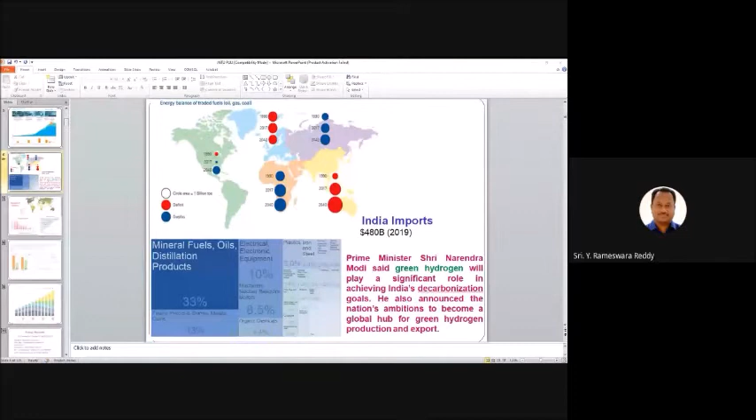So now we will discuss about this energy balance for different fuels for different countries. If you see USA, in 1990 they were an energy deficient country basically, but now they are a surplus country. Again if you see Middle East, they are always an energy surplus country, and European Union is always energy deficient even by 2040, similar to Asian countries like India, Sri Lanka, Bangladesh. Even China, these are energy deficient countries.

Also you see in 2019, India imports around $480 billion. So in that, if you see, 33% is coming from the fuels, that is we are importing too much oil from other countries. So if you want to increase our GDP as well as develop our own resources, we should decrease the imports of oils and other products.

Maybe you have seen, I think recently, the Prime Minister has given some speech on Independence Day. So what he said is that green hydrogen will play a significant role in achieving India's decarbonization goals. He also announced the national ambition to become a global hub for green hydrogen production and export. So what it means is that now we are importing too much oil and gas, and we want to reduce this. We will generate hydrogen in India and export it to other countries, meaning we'll decrease the imports and make hydrogen exports to other countries. That is actually the goal of the Indian government.

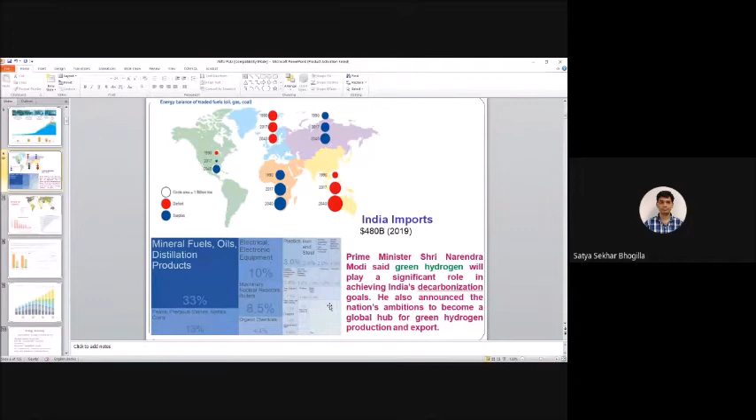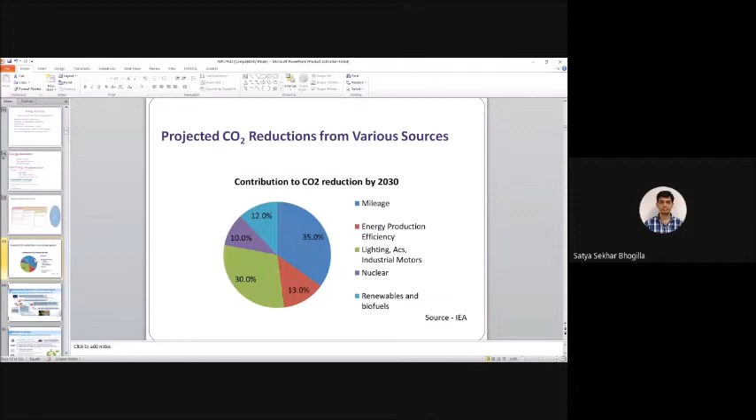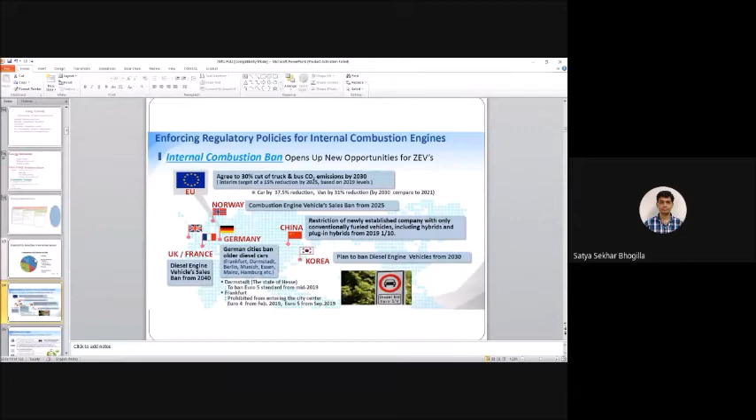What is the replacement of these IC engines, and what is the replacement of oil for the transport sector? First, one option is natural gas, but the problem is it's not a long-term solution.

Second option is second generation biofuels. But if you use too much biofuel, it may impact the food situation because you are using land to generate biofuel. Again we have impact on environment, because if you use too much land, you have to cut forests and use more fertilizers and water.

Then we have a third option, electrical drives like lithium-ion batteries and other kinds of batteries. At present, battery vehicles are getting importance, and the government is already giving some subsidy to electrical drives. Then another option is hydrogen as a fuel.

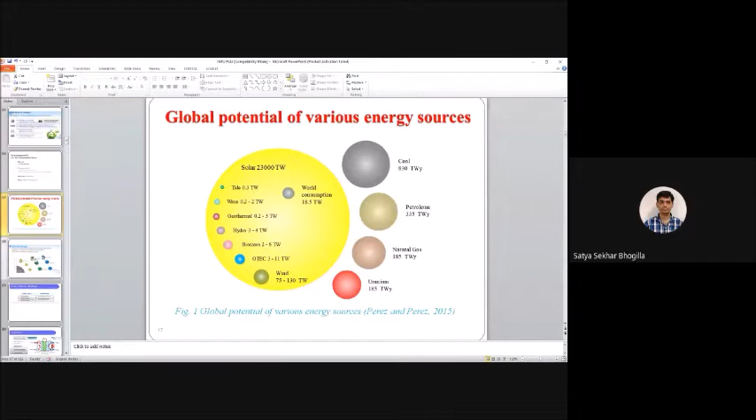In these ZEVs, zero emission vehicles, we have batteries and hydrogen-based fuel cells. Battery-based vehicles are useful if you go within the city, like 50 or 100 kilometers. But if you have a truck that has to go 1,000 or 2,000 kilometers, the required battery capacity becomes too large—you cannot carry that much volume of battery in a truck. So in that case, battery systems are not useful, and you have to go for hydrogen-based fuel cell vehicles.

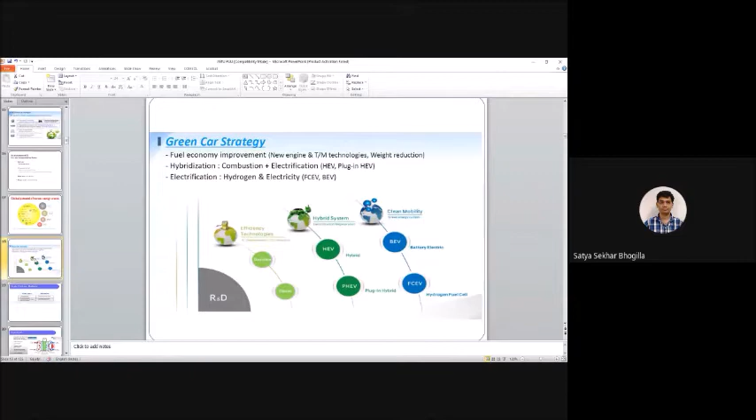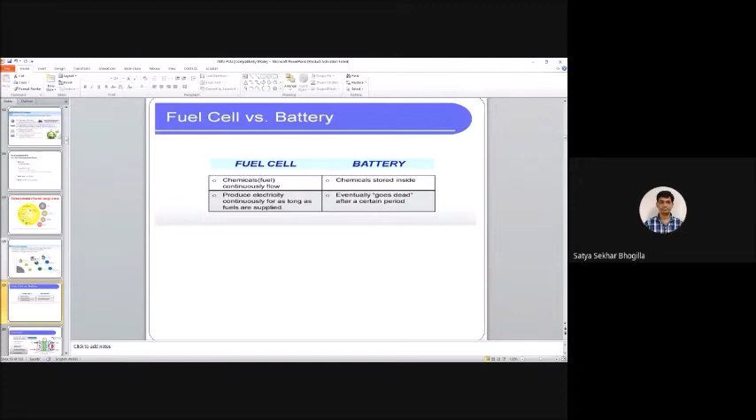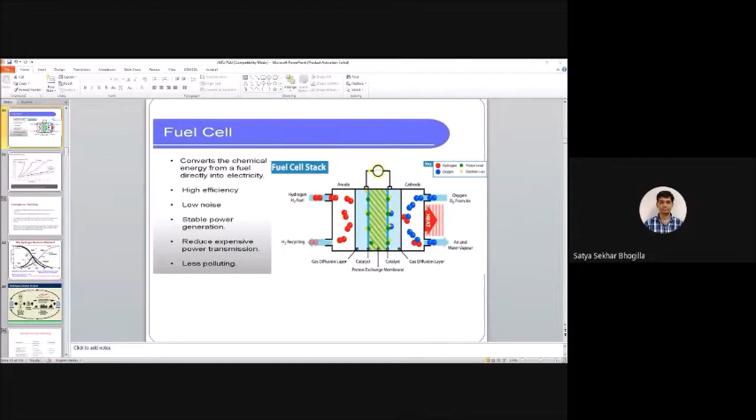What will happen is this hydrogen will dissociate into one proton and one electron. The proton will transport through the membrane and go to the other side, the cathode side, and the electron will not pass through the membrane, it will go to the electrical load instead, as you can see in yellow color. So the function of the membrane here is it will only allow protons, not electrons. On the cathode side the oxygen is coming, and on the other side we have protons as well as electrons, so all combine to form water vapor.

So here our input is hydrogen as well as oxygen, and output is electricity as well as heat, because this is an exothermic reaction. So the fuel cell operates in exothermic mode, whereas the electrolyzer operates in endothermic mode, depending on the temperature.

So compared to IC engines, what are the advantages of fuel cells? Basically, it converts the chemical energy from fuel directly into electricity. It has high efficiency compared to IC engines. There is no noise, stable power generation, reduced expensive power transmission, and it is less polluting. There is no pollution at all.

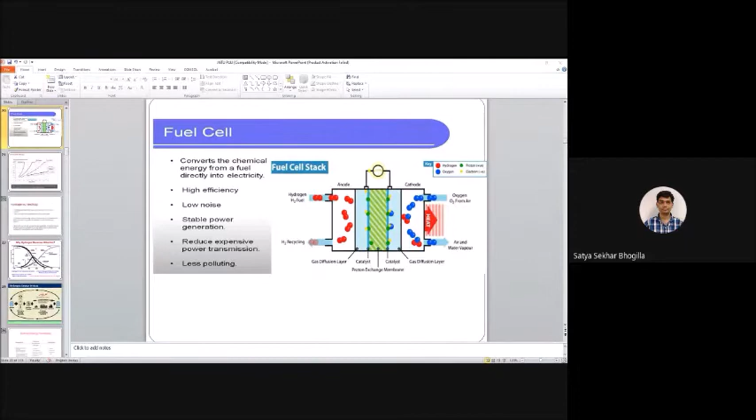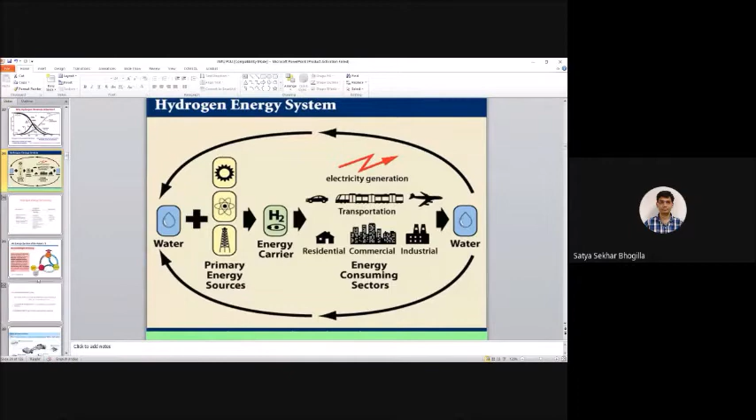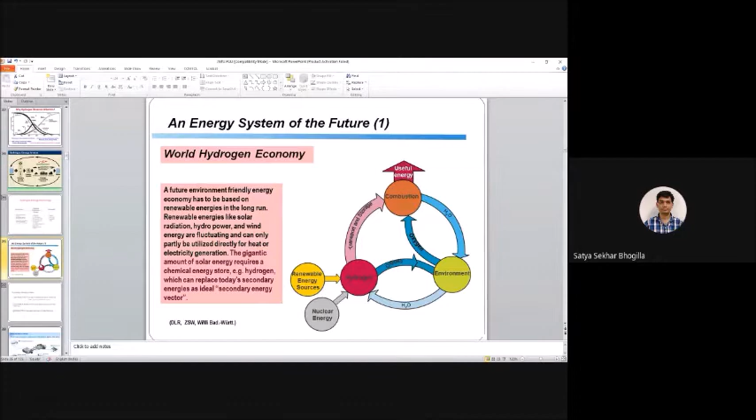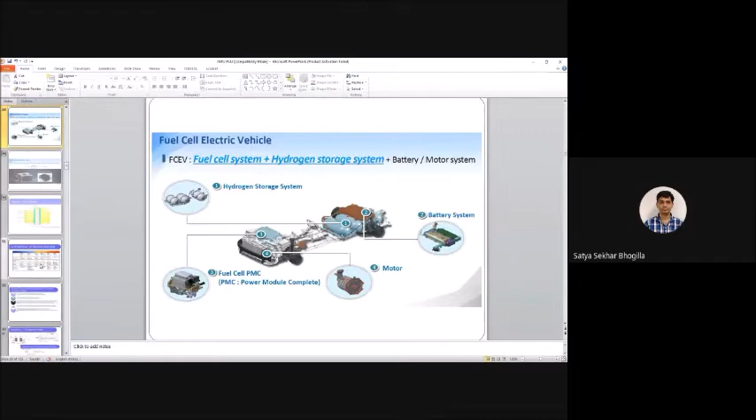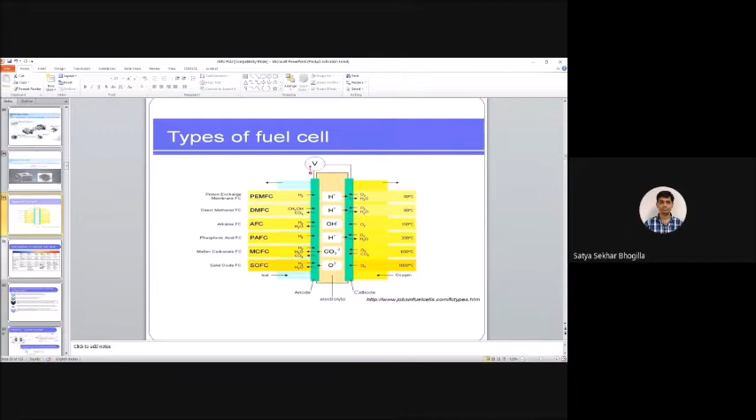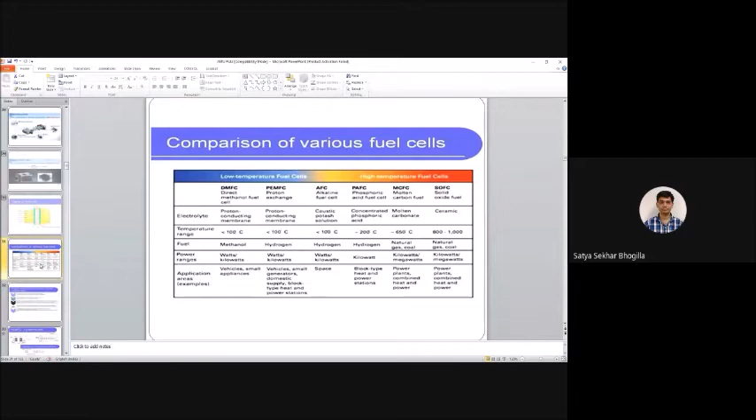Again, applications are different. A PEM fuel cell you can use for vehicles, small generators, small CHP applications. Whereas alkaline fuel cells have already been used in space for around 50 years. Then molten carbonate or solid oxide fuel cells are basically for CHP applications like power plants, combined heat and power generation. For power plants, the solid oxide fuel cell is very good compared to other kinds of fuel cells. I will explain later why the solid oxide fuel cell is very useful for small, distributed power plants.

So if you see this, the brief history of the fuel cell, the concept is coming from Sir William Grove. He demonstrated the fuel cell operating principle in the 19th century, 1839. It's very long ago that he demonstrated the fuel cell. Then it was reinvented by Francis Bacon, who started working on fuel cells almost 1 century later, in 1937.

So by the end of the 1950s, he was able to develop a 6 kilowatt cell. Actually, this is a tremendous effort, to develop a 6 kilowatt cell in the 1950s itself. Then the first practical application for the fuel cell came from General Electric. They developed the first PEM fuel cell for the Gemini program in the 1960s for NASA.

Again, this was followed by the Apollo program, where Pratt and Whitney built fuel cells based on Bacon's patents. So the first application came in the 1960s, almost 60 years back. But we didn't use it for terrestrial applications. We used it for space applications. Then General Motors experimented with a fuel cell powered van with cells from Union Carbide in the 1960s.

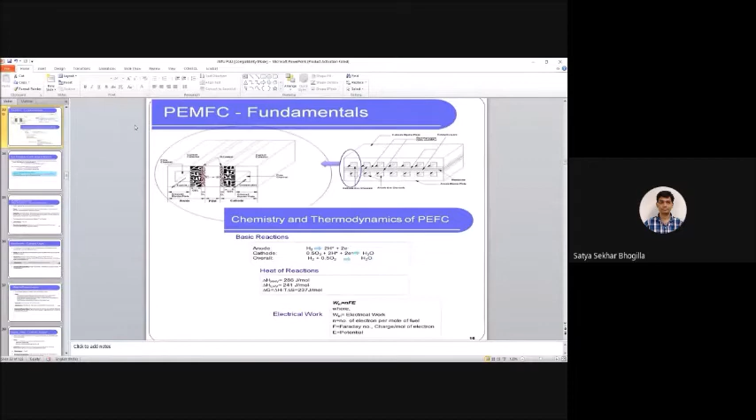So consider the various heats of reaction, like the higher heating value and lower heating value. The higher heating value is 286 kJ per mole, whereas the lower heating value is only 241 kJ per mole. And if you want to calculate the electrical work, how much power the fuel cell generates, you can use the equation W = nFE, where W is the electrical work produced by the fuel cell, n is the number of electrons per mole of fuel, F is Faraday's constant, and E is the potential.

So assuming the ideal case, the total Gibbs free energy is converted into electrical work. Then we can calculate the cell potential, how much voltage a single cell can generate; that will be 1.23 volts. This is the ideal case, but in practice the voltage generated by a single fuel cell will be less than this. Now, based on this ideal case, you can calculate the maximum energy efficiency of the system. If you use the higher heating value, it will be around 83%, and if you use the lower heating value, it will be around 94%.

Now, the Carnot efficiency of an IC engine is less compared to these values. You may also have a doubt why this efficiency is higher than the Carnot efficiency. It's because the fuel cell is not a heat engine but an electrochemical engine, therefore the Carnot efficiency limit is not applicable here. That's why I told you earlier that fuel cells are highly efficient compared to IC engines.

So if you calculate efficiency in CHP applications, where you take power as well as heat, the efficiency will go to around 80%. So if you consider both power generation and heat generation from the fuel cell, the efficiency can go up to 80%.

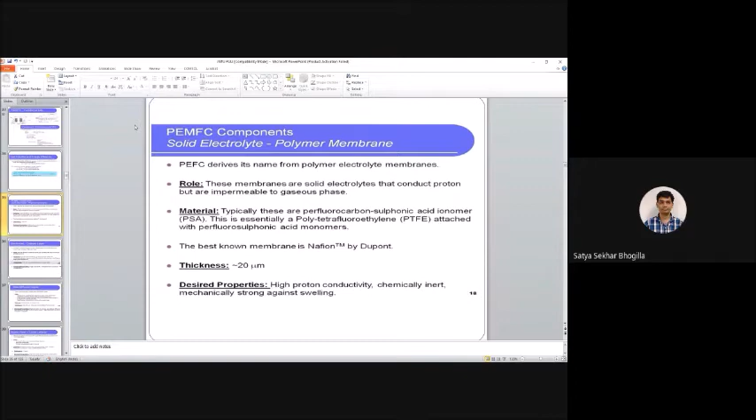Then if you talk about the catalyst layer, it is present between the electrolyte and the gas diffusion layer. As I showed earlier, it is in between the electrolyte and the gas diffusion layer. The role of this catalyst layer is that all the desired reactions take place at this site.

As for the materials for the catalyst layer, platinum is the best material, but the problem is that platinum cost is very high. Some research has already been done, and they have developed platinum-based alloys, where the platinum content is decreased compared to pure platinum, and other kinds of materials are also coming into the picture.

Here the thickness is less than 10 microns, and could be thinner on the anode side compared to the cathode side. The desired properties for the catalyst layer are high reactivity and resistance to corrosion and coagulation.

The next part is the gas diffusion layer. This layer is between the catalyst layer and the bipolar plate. Its role is as a porous layer for distributing the reactants evenly to all the reaction sites, meaning the catalyst layer, and to remove the product. That is the objective of the gas diffusion layer.

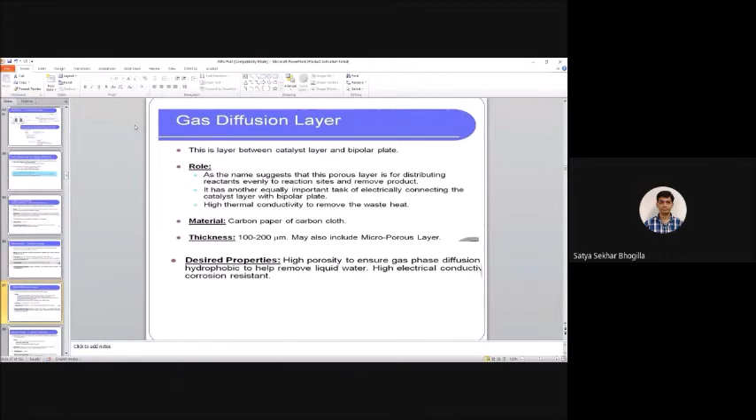Then the final one is the bipolar plate, which we also call the current collector. This is the outermost component of the fuel cell. It has gas channels to supply reactants and remove the products. Its role is to connect the outer circuit and drive the current, remove waste heat from the fuel cell, and provide structural strength to each cell.

For the material, graphite is more common. Thickness will be 1 mm; this is the thickest part in the fuel cell. The desired properties are high electrical and thermal conductivity, corrosion resistance, and mechanical strength. So these are the different parts of the fuel cell.

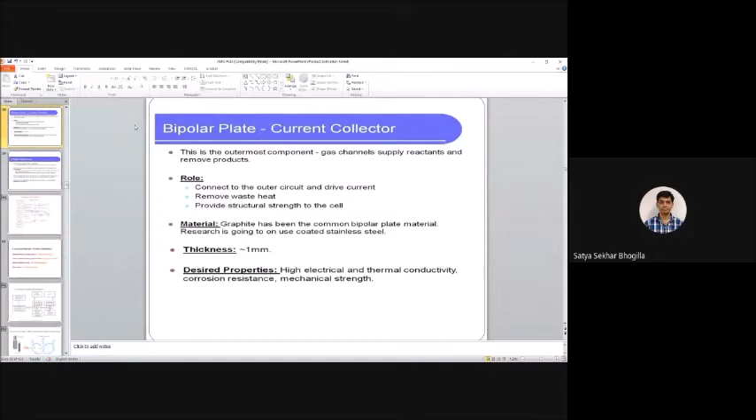Next important is water balance. Water balance is very, very important in fuel cells. Water is essential to PEM operation, because to maintain high proton conductivity, the membrane must always be well hydrated. Only then can you efficiently transport the protons from anode to cathode. Water is produced in the cathode catalyst layer, which is adjacent to the membrane.

Too much water results in condensation and therefore blockage of the electrode and gas diffusion layers. What will happen if the water is too high? It will block the hydrogen and oxygen, and then the fuel cell will stop. That we call flooding in the fuel cell. Once flooding happens, the fuel cell will stop generating power. So you have to maintain the proper water balance in the PEM fuel cell. It should not be too low and it should not be too high.

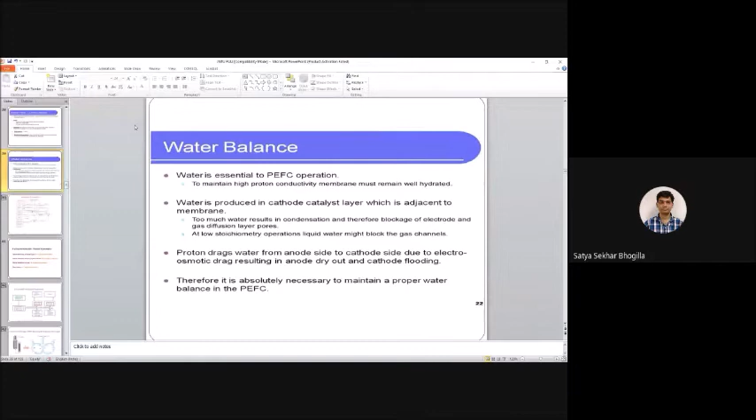Then coming into hydrogen production. How will you generate hydrogen to use in fuel cell vehicles? That is very, very important. If you want to have hydrogen fuel cells, first you have to generate hydrogen from renewable energy sources. Present technologies we have are steam reforming of natural gas around 48%, partial oxidation of hydrocarbons 30%, partial oxidation of coal 18%, and electrolysis 4%.

So most of the hydrogen we are producing from fossil fuels. Now it has to shift from fossil fuel to renewable energy production. Only then can these hydrogen-based fuel cell vehicles be called green vehicles or zero emission vehicles.

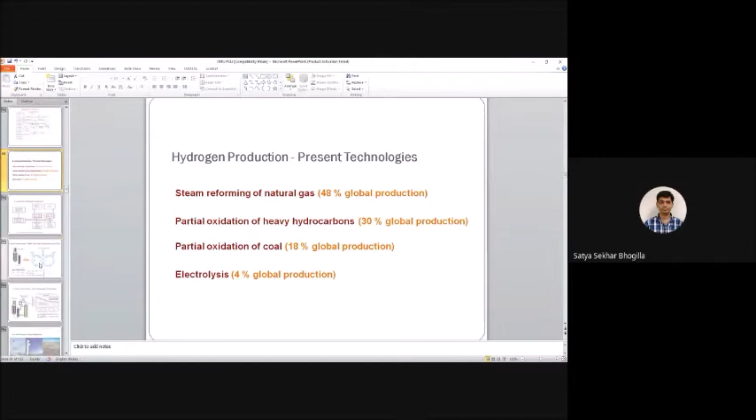So now we have hydrogen production and we have fuel cell vehicles. But how to store the hydrogen is a very, very important concept for fuel cell vehicles or stationary purposes. First, we have different options like high pressure gas cylinders, maybe you have seen that red color cylinder, and another option is liquid hydrogen cryogenic tanks.

We have different materials which will absorb hydrogen, like metal hydrides, liquid chemicals, porous materials, carbon nanomaterials, or glass microspheres. So we have different options for hydrogen storage, but we have to see which one will be more useful or more practical for transport vehicles.

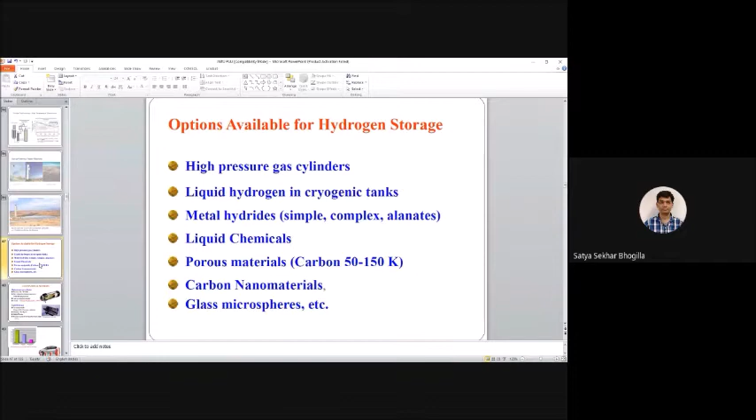So first we'll see high pressure gas cylinders, the conventional method. Hydrogen is a very low density gas. If you want to carry it at atmospheric pressure, you have to use huge tanks. To reduce that volume, you compress the hydrogen in the tank, so you can reduce the volume while maintaining the same amount of hydrogen inside.

We have different technologies like storage cylinders up to 700 bar and 800 bar, composite metal tanks. But the problem is, to compress the hydrogen up to 700 bar and store it in the tank, you have to spend around 18% of the hydrogen energy stored in the tank.

Suppose you want to store 300 bar or 350 bar hydrogen in the tank. From atmospheric pressure to 350 bar you have to compress the hydrogen, and that compression energy will take almost 18% of the hydrogen energy. Means you already lost about 20% for compression itself. That much energy is required to compress the hydrogen.

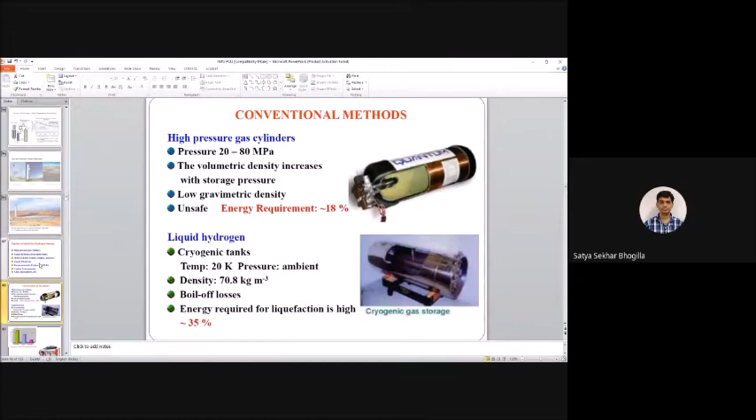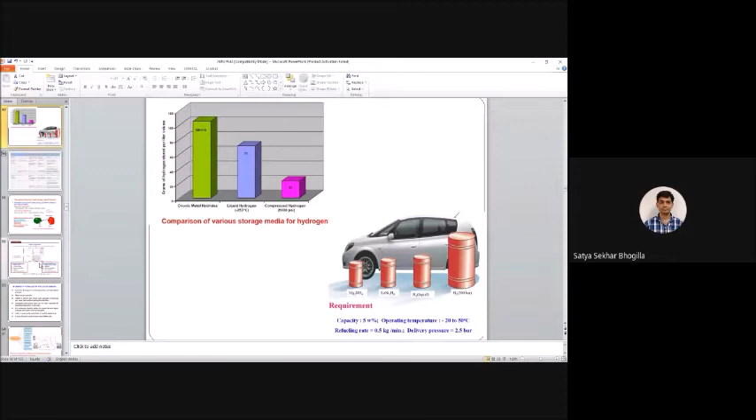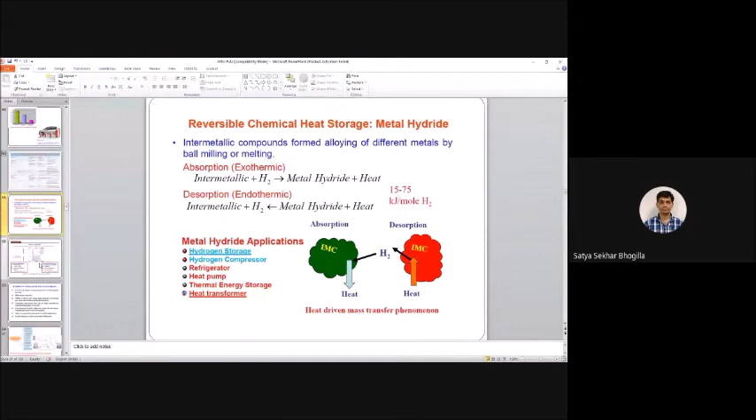Again, in metal hydrides, absorption has sub-processes like physisorption, where your hydrogen molecule just sticks to the metal hydride surface. Then chemisorption, where these hydrogen molecules divide into two atoms. Then surface penetration, where these atoms penetrate through the surface. Then we have diffusion, and finally nucleation and growth, so basically it becomes a metal hydride. Desorption is entirely opposite. This is the absorption and desorption of the metal hydride.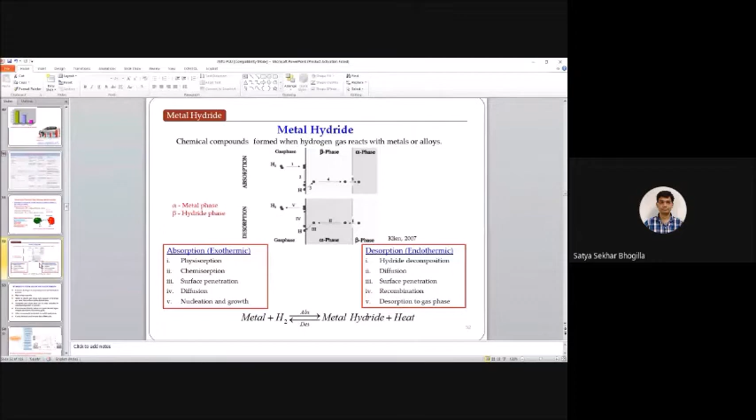So for hydrogen storage by metal hydrides, as I explained, you can store hydrogen at room temperature and atmospheric pressure, compared to conventional methods like compressed hydrogen cylinders or liquid hydrogen cylinders. High storage capacities, and the ability to absorb and release large amounts of hydrogen many times without deterioration. You can also control this absorption and desorption by adjusting temperature and pressure.

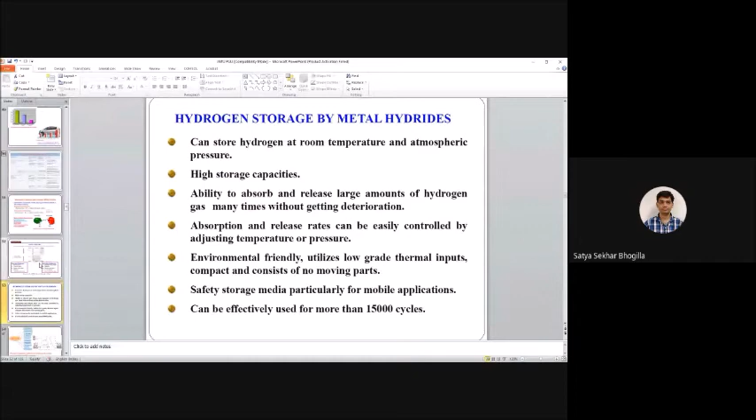Different metals have different operating conditions, and based on that you can use them. You can also play with this heat, with the exothermic and endothermic reactions, to create some kind of thermal machines. It is very safe storage, particularly for mobile applications, and can effectively go for more than 15,000 cycles. These are the various applications, and you can also see the pressure composition isotherms for different materials.

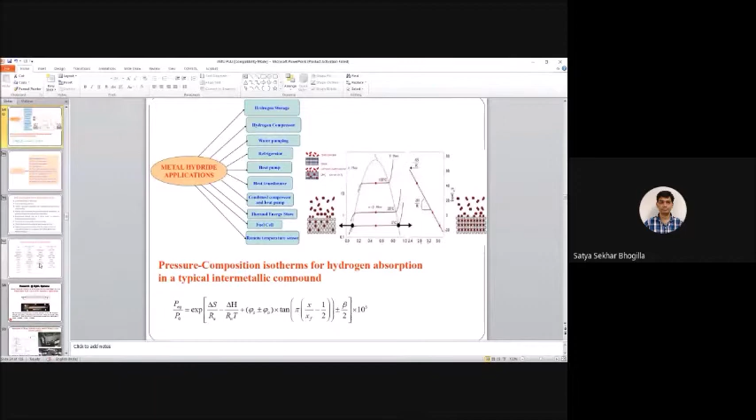These are the various advantages if you use metal hydride based energy conversion systems. They are environment friendly, utilize low grade energy, compact in construction, with no moving parts. They offer a wide range of operating conditions, there is no liquid circuit, and they operate in any orientation. These are the various advantages of metal hydride systems.

So now I'll show one practical system where we have worked on a golf cart, hydrogen-based golf cart. Okay, you can see here, first we have developed the hydrogen storage cylinder based on the metal hydrides.

So you can see the metal hydride system for hydrogen storage and supply to low temperature PEM fuel cell for automotive applications. Here in this figure, the first one is your stainless steel container, second is your heat exchanger.

Why you need a heat exchanger is, as I mentioned earlier, metal hydride hydrogen absorption-desorption is a heat driven mass transfer phenomenon. If you want to absorb hydrogen very fast, like given by DOE at 0.5 kg per minute, then you need a high absorption rate, so you have to remove the heat as much and as fast as possible, because as hydrogen is absorbing, heat is released. Otherwise the pressure will increase, and then your absorption rate will decrease.

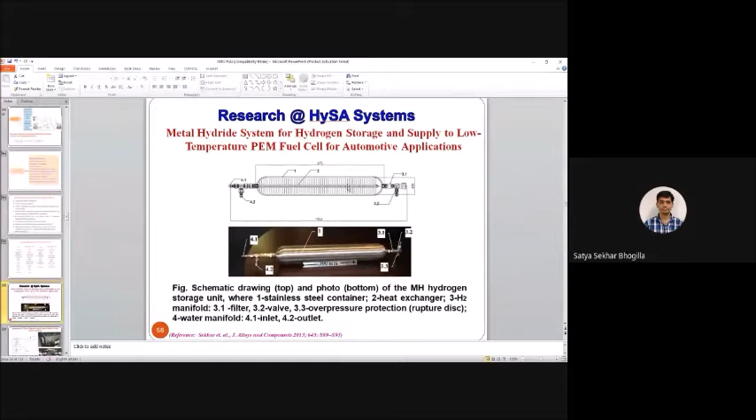So here you can see the integration of the metal hydride system with the PEM fuel cell in the electric golf cart. Here is the layout of the total system. First is your metal hydride container for hydrogen storage.

Second is your compressed gas cylinder, which acts as a buffer cylinder. Third, you have a pressure reducer, because since you're using a compressed gas hydrogen cylinder, it has to reduce the pressure before supplying it to the fuel cell.

Fourth is your recharging valve. Whenever the hydrogen is over, you have to recharge through this valve. And fifth is the heat exchanger in the metal hydride.

As I told, this metal hydride absorption-desorption is a heat and mass transfer phenomenon. For desorption, you have to supply heat; for absorption, you have to remove heat from the metal hydride. Again, 6 and 10 are the air-liquid heat exchangers, and 11th is the fuel cell stack.

So here you can see this fuel cell and metal hydride are integrated thermally. Meaning, as I explained, if you supply hydrogen to the fuel cell, it will generate heat as well as electricity. So the generated heat will be supplied to the metal hydride to desorb the hydrogen. Like that, the generated heat in the fuel cell can be utilized for desorbing hydrogen from the metal hydride. So this is an integrated, thermally driven hydrogen storage as well as fuel cell system.

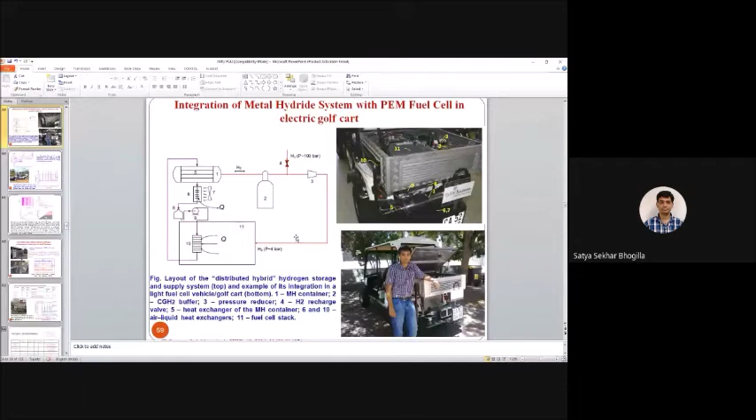So initially we used only the metal hydride cylinder to supply hydrogen. Here you can see we ran this golf cart for almost 1 hour. After 1 hour, the tank pressure fell, and it was not able to supply the required hydrogen to the fuel cell. Then the fuel cell stopped.

Then we added some kind of buffer cylinder, based on compressed gases, and tested again. So now this is a hybrid system, and it can go up to almost 2 hours without any disturbance. This golf cart was tested for almost 2 hours with the hybrid system.

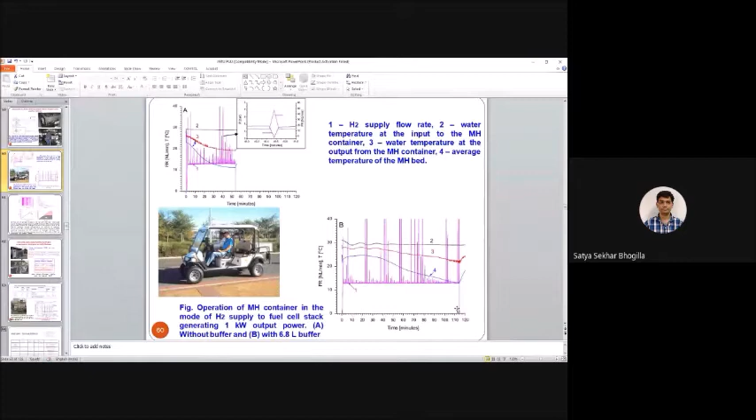So why, with only metal hydride, it lasts just 1 hour, but adding a buffer cylinder extends it to almost 2 hours? Because when you're removing hydrogen at a faster rate, this is an endothermic reaction, and you have to supply heat as fast as possible. If you're not able to supply heat at a faster rate, it will take heat from itself.

This means the temperature will decrease in the metal hydride. Once the metal hydride temperature decreases, obviously the pressure will also decrease, as per the PCT diagram I showed earlier. Then it cannot generate or desorb hydrogen at the required pressure level, and the supply to the fuel cell will stop, so your fuel cell will be stopped.

The temperature inside the metal hydride will maintain above atmospheric level. Then the pressure also can maintain above atmosphere, so there is no problem to desorb the hydrogen.

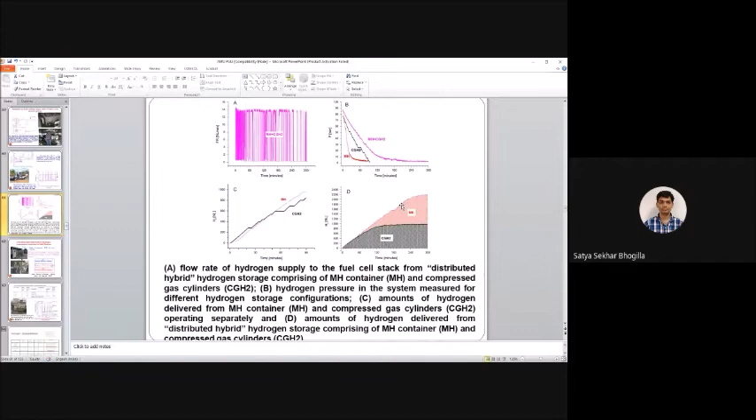Again, we talked about hydrogen refilling. But how to refill this compressed gas or other applications? How to compress the hydrogen? Basically we are using mechanical based compressors that use electricity, and mechanical compressors are not safe to compress hydrogen from low pressure to very high pressure.

If you use metal hydride systems for hydrogen compression, they can take waste heat from industry, suppose around 120 to 140 degrees centigrade. That waste heat or low grade heat can be supplied to the metal hydride system, and it can compress hydrogen from low to high pressure. You can play with this pressure-composition-temperature graph to compress hydrogen from atmospheric pressure to high pressure.

Once you generate hydrogen through electrolysis, you can get a maximum of around 20 to 30 bar. But if you want to refill this 20 to 30 bar hydrogen into compressed gas cylinders for hydrogen fuel vehicles, you need a hydrogen compressor to compress it from 20 bar to around 350 bar or 700 bar.

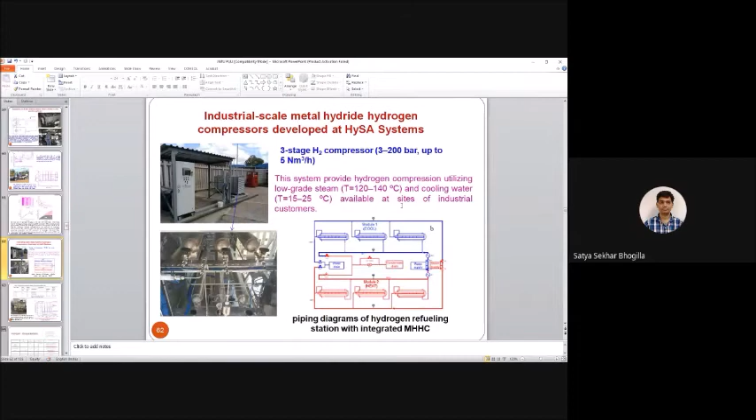So here we have developed a metal hydride based hydrogen compressor to compress hydrogen from 3 bar to 200 bar in 3 stages, with a capacity of up to 5 normal meter cube per hour.

As I explained, this is a 3-stage compressor. We used 3 kinds of materials to compress hydrogen. For the first stage, we take hydrogen at 3 bar coming from the electrolyzer and compress it to 20 bar. Then in the second stage, with a different material, we compress from 20 bar to 50 bar. Then the third stage compresses from 50 bar to 200 bar. Like that, we can compress hydrogen from 3 to 200 bar just by using waste heat from industry, with no need to supply electricity.

Here you can see the pressure increment in different stages: first stage, second stage, third stage, going up to almost 200 bar over time. You can see the inlet pressure and the outlet pressure.

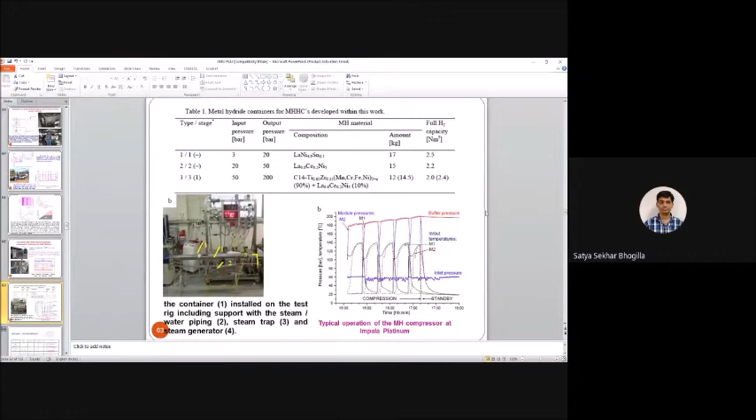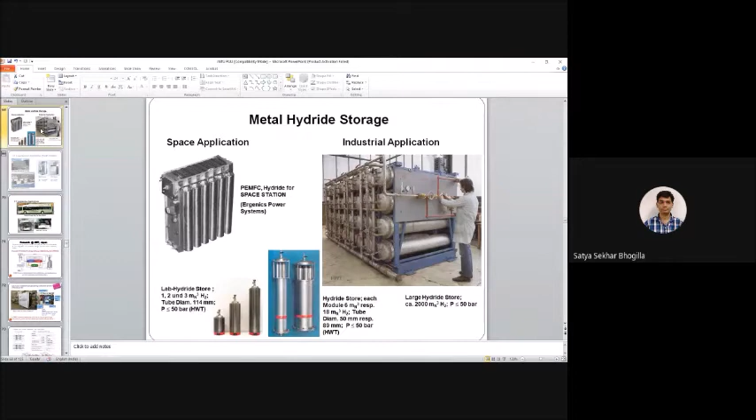So these are the various applications of metal hydrides for different uses like space stations and industrial applications. And you can see the fuel cell based automotive applications in Germany.

Now, initially we discussed how to match demand and supply. As I told, India has a target of 175 gigawatt of renewable energy by 2022, and the target is much higher by the end of 2030. So you want to generate a lot of power from renewable energy to supply to the grid, but the problem is this renewable energy is of an intermittent nature.

You cannot predict how much power you will get constantly from renewable energy. Your demand is also fluctuating and your supply is also fluctuating, but you should match these two for grid application. Load leveling and fluctuation absorption are the main bottlenecks to integrating renewable energy into the future electric grid system. If the demand and supply differ too much, the grid may fail. So in that case, you have to store the excess amount of energy in some form, and that stored energy will be supplied to the grid whenever demand is more than supply.

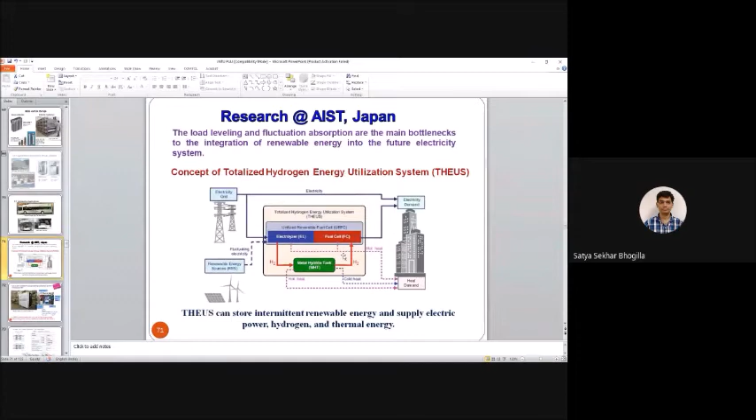Here you can see the lab scale totalized hydrogen system developed at AIST, Japan. It is having a unitized reversible fuel cell, and we have one metal hydride tank.

Also you can see this inner view of the URFC, where we have the stack, fuel cell stack, and we have a DC load for fuel cell application, whereas DC power for electrolyzer application, because in electrolyzer application you have to supply the power, whereas in fuel cell mode you have to take the power from the fuel cell. So we use DC load as well as DC power, and we have some chilled water to extract the heat from the fuel cell stack.

This URFC has some 10 cells, and each cell's cross section area is about 250 centimeters square. If you consider this system in electrolyzer mode, it can take up to 4.4 kilowatt, meaning you can supply electrical power in electrolyzer mode around 4.4 kilowatt, whereas in fuel cell mode it can generate up to 680 watt.

This means the system is more towards electrolyzer mode, because here we didn't use a separate fuel cell and separate electrolyzer. If you use a separate fuel cell and separate electrolyzer, you can use the same kind of system size, like 4.4 kilowatt electrolyzer or 4.4 kilowatt fuel cell. But here, to decrease the capital cost, we used a unitized reversible fuel cell. I will explain what is URFC later.

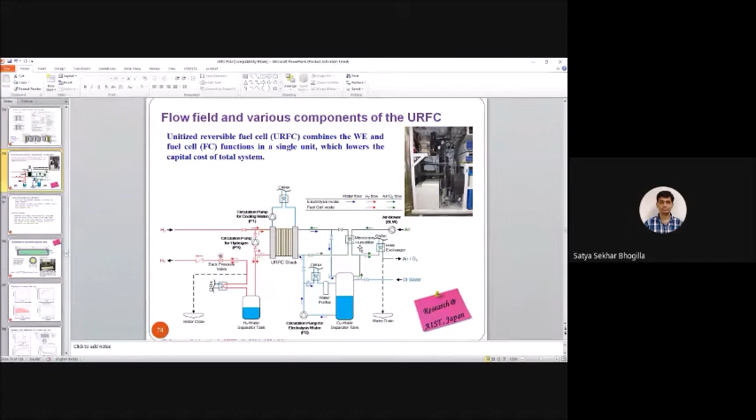So as I explained, this URFC can work in electrolyzer mode and fuel cell mode. So it can bring down the capital cost compared to individual systems, with a higher operating ratio per device, because if you use individual systems, like if you use the electrolyzer for 8 hours, for those 8 hours the fuel cell would be idle and cannot be used. Whereas if you use fuel cell mode, then the electrolyzer is idle. So we are keeping both in the same system, so that we can increase the operating ratio per device.

And also, if you combine both modes in a single system, we have fewer maintenance parts, because we are using the same pipelines, same valves, everything for both operations.

Now, coming to hydrogen storage, we already discussed compressed, liquid, and solid forms. Here we have used metal hydrides as the hydrogen storage medium, because they can store at ambient pressure and temperature. Because this is a stationary application, we don't need high pressure or very low temperature hydrogen liquefaction, because we should not spend the system's energy on hydrogen storage.

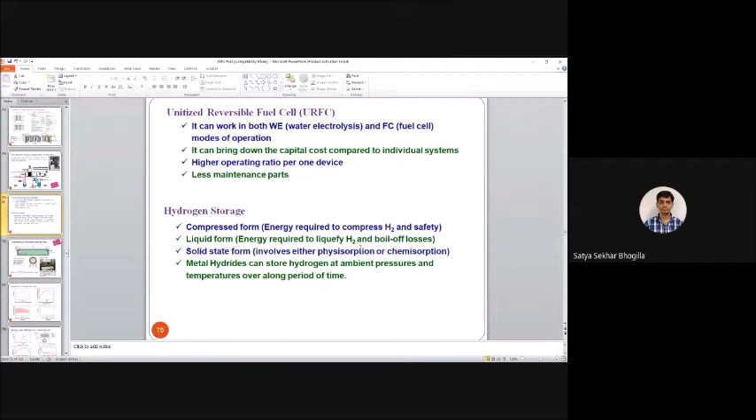Here you can see the schematic of the metal hydride tank for hydrogen storage. The composition of the metal hydride is MmNi5, and we used around 50 kg of metal inside the tank. The total weight, including the tank, which is a 316 tank, is around 85 kg, and the size of the metal hydride particles is around 500 microns.

Then we also used a heat exchanger, because as I explained, absorption and desorption are heat and mass transfer phenomena. Metal hydride thermal conductivity is basically very, very low. To enhance the heat transfer inside the tank, we use a double coil heat exchanger.

We also use a thermal insulator to arrest the heat loss to the atmosphere, so that we can calculate how much heat we can generate from the metal hydride tank in absorption, or how much heat is required to supply in fuel cell mode.

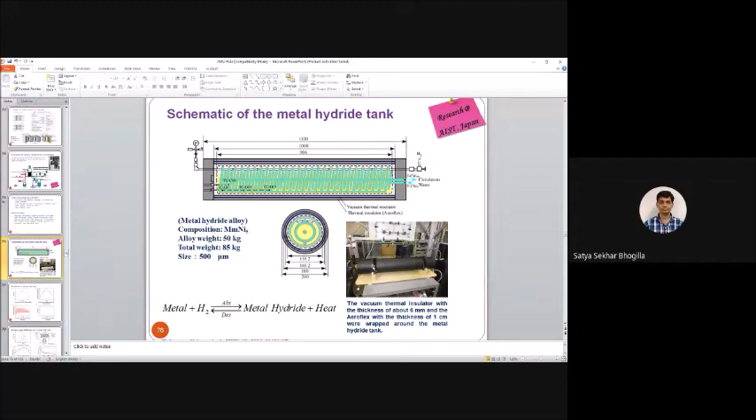Now, coming to the testing. As you know, the solar PV generating power will increase up to noon, and after that it will decrease if it is a sunny day. We want to connect this system to renewable energy, so we tested first with a solar PV system. The power increases up to afternoon, and after that decreases. This is the power input in electrolyzer mode.

Now you can see the output of the system, that is hydrogen production in electrolyzer mode. Both trends are similar; it is exactly matching your power input. This is the input supply, and this is the output from the system. We are supplying electrical energy, and we are getting hydrogen from the system. We operated around 10 hours, because for 10 hours solar power is generated from the PV cells.

After that, there is no power from the solar PV. Then what do we have to do? We have to go to the fuel cell mode. This is excess power from the solar PV, and after 10 hours there is no power generation, so we generate power through the fuel cell using the stored hydrogen. The stored hydrogen can be supplied to the fuel cell to generate power.

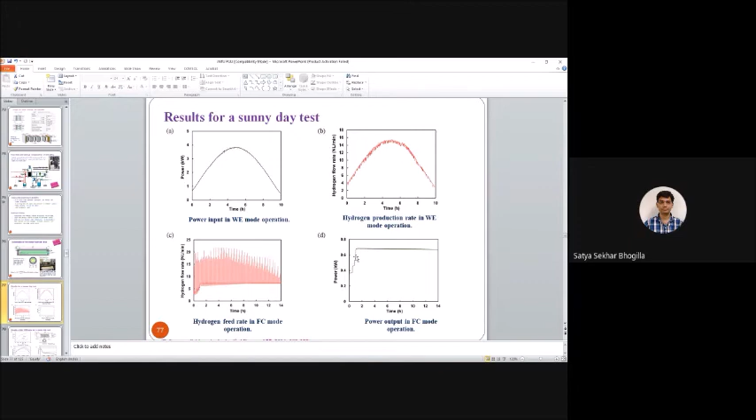You can also see the results of the metal hydride tank. This is absorption, meaning the electrolyzer produces hydrogen and it is stored in the storage tank. As I told, absorption is an exothermic reaction, so heat has to be extracted from the metal hydride. If you are not able to extract it fast, the temperature will increase, and then the pressure will increase as per the PCT curve.

So the pressure increases with respect to concentration in absorption mode, whereas in desorption mode, as I explained, the hydrogen is released, and you have to supply heat from the fuel cell to the metal hydride tank. Because you may not be able to supply heat that fast, the metal hydride takes heat from itself, so the temperature decreases. If the temperature decreases, the pressure also decreases. So this is the pressure curve in desorption mode inside the tank.

Then we will also see the various temperatures inside the tank and the input and output of the heat transfer fluid. Okay, so these are the curves inside the tank at different locations of the reactor, because as I told, this is an exothermic reaction, so heat is released during the absorption process. What we are doing is supplying a heat transfer fluid at constant temperature throughout these 10 hours during electrolyzer mode. So this is your inlet temperature and this is your exit temperature.

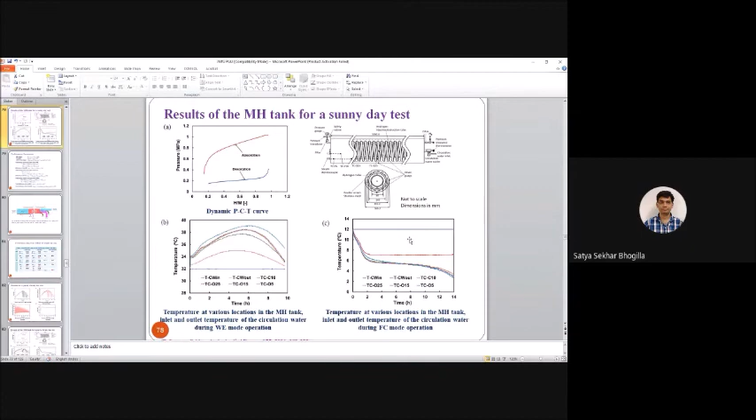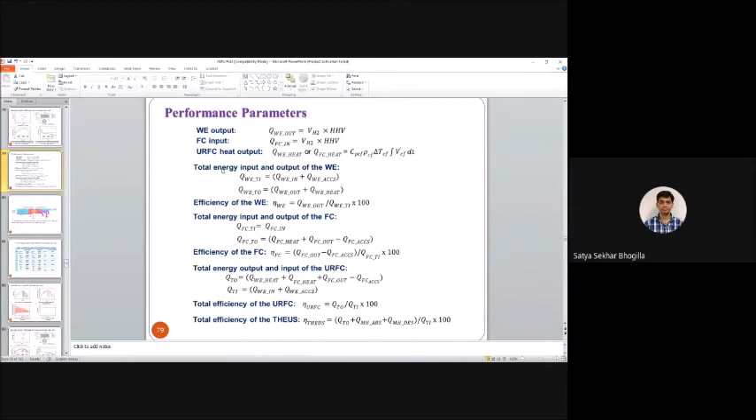Then these are the different parameters to calculate the efficiency in electrolyzer mode and fuel cell mode, including heat output from the metal hydride. So these are the various performance parameters to see how much efficiency we can get from the URFC. So I'm going to the next slide.

Now here you can see the schematic of energy flow from the power input to the electrolyzer, as well as power output in fuel cell mode. This is your input to the electrolyzer. We are supplying total electrical energy coming from renewables into the electrolyzer. This is converted into hydrogen, some heat loss, and some reversible heat from the electrolyzer. So we have converted this much renewable energy into this much hydrogen energy.

Now in power deficient mode, you have to supply the power from the fuel cell. We stored hydrogen in the electrolyzer mode. This will be supplied to the stack so that it can generate power as well as thermal heat. Some heat we cannot extract because of losses, and some heat we can extract for other thermal applications.

Also, some of the generated electricity is used for balance of plant, like the compressor and other components. So some amount of power generated by the fuel cell, it will consume itself. So this is the schematic of energy flow for electrolyzer operation and fuel cell operation.

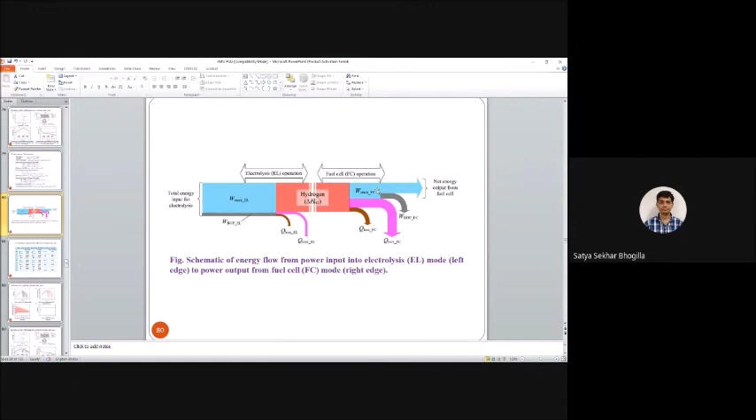Now we can see the performance data of the THEUS for a sunny day. The electrolyzer efficiency we got is around 83%. If you include the heat output from the electrolyzer, that counts as 94%. Whereas in fuel cell operation, the efficiency is around 24%. If we add heat output from the fuel cell, it becomes 52%. This is the CHP efficiency.

Now, if you calculate the entire round trip efficiency, electrical input and electrical output with heat output, we get around 51%. Again, you can also add the heat output from the metal hydride during absorption and the cold heat output from the metal hydride during desorption. If we add these two, the total becomes 64% for the total system.

So here, this is the efficiency of your reactor, your absorption tank. Out of the heat released during hydrogen absorption, we recovered around 83% using a heat exchanger. The remaining 17% is lost to the atmosphere. This comes from 6.76 divided by the theoretical amount of heat liberated in the metal hydride, so that is 83%. So the total efficiency of the system is 64% for both electrolyzer operation and fuel cell operation.

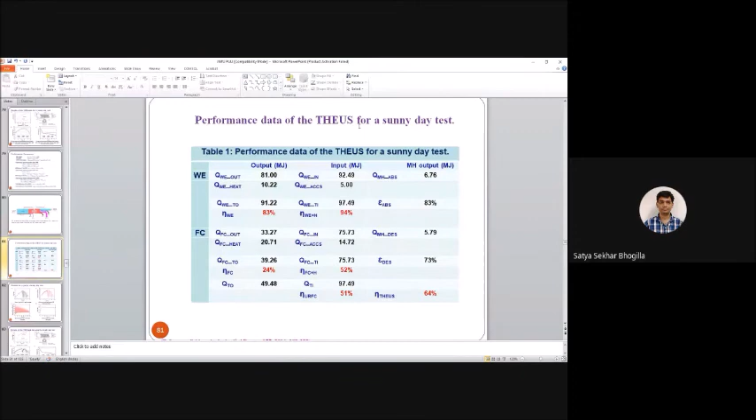Now we can see the same system for a cloudy day. As you know, on a sunny day the power generation from solar PV will increase and then decrease, but most days the pattern is not like that. Most days it has fluctuations. If it is a cloudy day, there will be too many fluctuations in the power from the PV cell. Now we tested this system for a cloudy day.

The morning is sunny, but the afternoon is partly cloudy. Now we want to see how this system will react to this fluctuating power input. So we run this system in electrolyzer mode with this fluctuating power, and we can see the hydrogen output from the electrolyzer.

You can see both are well matching, meaning the system responded properly to your power supply. Both the power input and the output from the system are well matching. It means the electrolyzer responded efficiently, without any problem, taking this fluctuating energy.

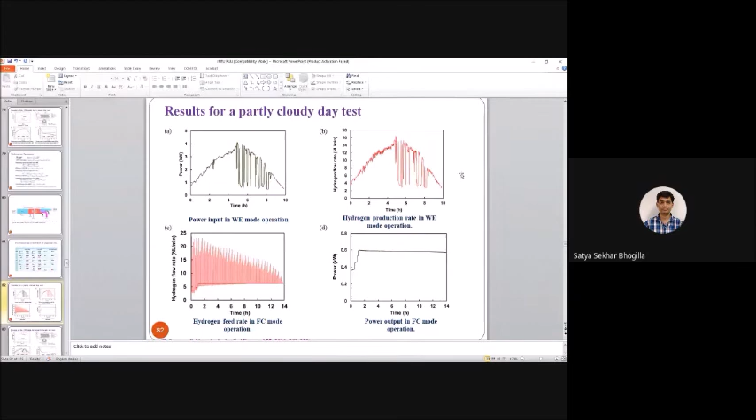Again, we run the fuel cell mode at night time, but this is similar to the previous test. The important thing is how the system takes this fluctuating energy and generates hydrogen. That is very important. Similarly, we have plotted for the hydrogen storage tank. You can see these fluctuations because of

the cloudy afternoon session. Again here there are fluctuations in the temperature, because once the generated hydrogen drops, the temperature inside the metal hydride tank also drops, because this is an exothermic reaction. Once hydrogen absorption decreases, the temperature also decreases, because you are taking heat away with the heat transfer fluid. Once absorption increases, the temperature increases again because of this exothermic reaction.

Here also the heat output from the system depends on how much hydrogen it is absorbing. This heat is directly proportional to the amount of hydrogen generated by the electrolyzer. That's why these fluctuations come, due to fluctuations in the amount of hydrogen generated by the electrolyzer.

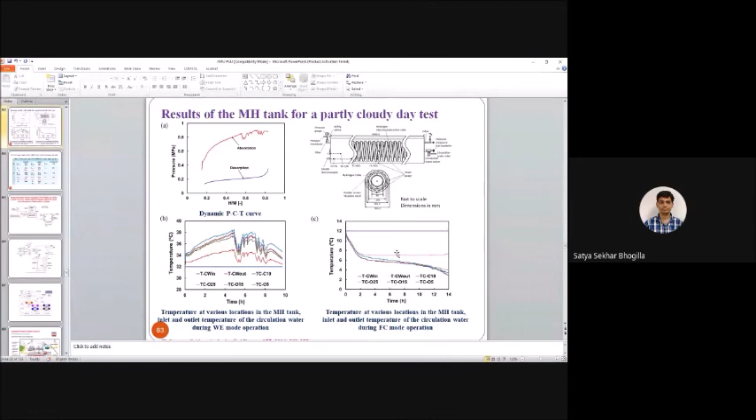Again, you can see the fuel cell operation. Fuel cell operation is similar to the sunny day, because no fluctuation affects the fuel cell mode. You can see the performance data. There is no difference. So the system is responding very fast to the fluctuating power.

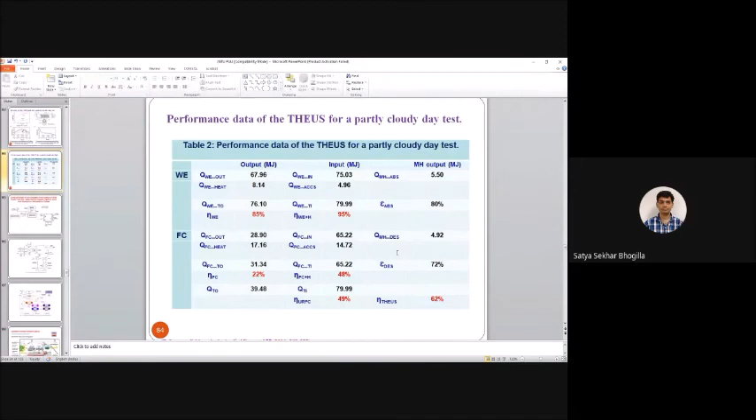Till now we have seen the PEM-based fuel cell, but the drawback of the PEM-based fuel cell is that we can take this waste heat only up to 65 or 70 degrees. But 65 to 70 degrees is not useful for most applications. So we can consider only the power coming from the fuel cell as an output.

But if you go for a reversible solid oxide fuel cell, as I explained before, the solid oxide fuel cell operates at 800 to 1000 degrees centigrade. So you are getting waste heat from the fuel cell at 800 degrees centigrade. This 800 degrees centigrade heat is very useful to generate electrical power as well as for various applications.

It will generate hydrogen, and the hydrogen will be stored in the metal hydride storage tank. By storing, it will release some heat, which will be an output from the system. Some heat will also be used for steam generation, because we have to maintain the electrolyzer at about 700 to 800 degrees centigrade. We have to supply some heat to maintain the temperature.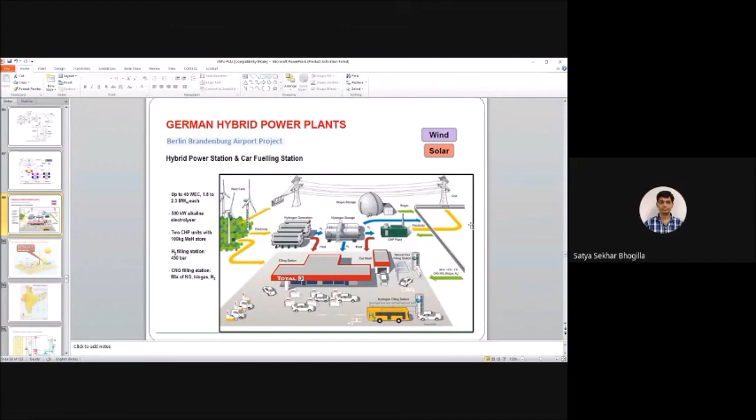There is one more example in Norway, called Utsira Island. They are also using wind turbines, and a hydrogen system to balance the power, as well as a flywheel for grid stabilizing. So they are storing excess power as hydrogen and supplying it to the households. This is a very small island in Norway.

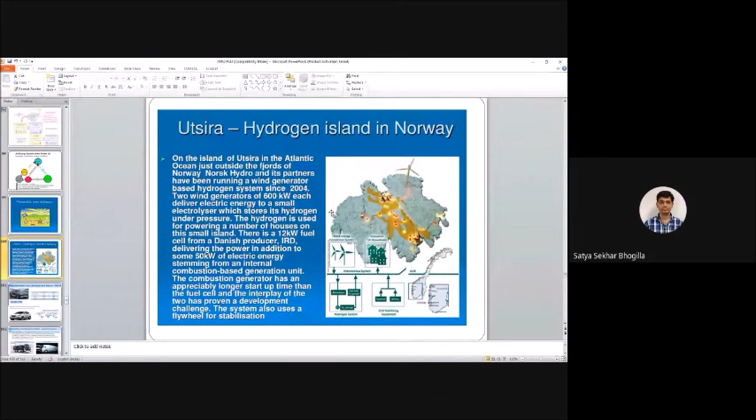So what are the challenges for hydrogen economy? First, obviously you have to produce hydrogen. The price of renewable energy based hydrogen is higher than the hydrogen from hydrocarbons.

You may have heard about the recent statement by Ambani that he wants to generate and sell hydrogen, 1 kg of hydrogen for $1 by 2030. Now the cost is around $5 to $10 per kg of hydrogen, but he wants to sell 1 kg for $1. That is the target for Reliance Industries.

So if you want renewable energy based hydrogen to compete with fossil fuel based hydrogen, you have to reduce the cost of the renewable based hydrogen system. Then only it can give tough competition to hydrogen from hydrocarbons.

Then there's storage. Storage is also a very important task. It is a great challenge to decrease the volume as well as decrease the weight of the system.